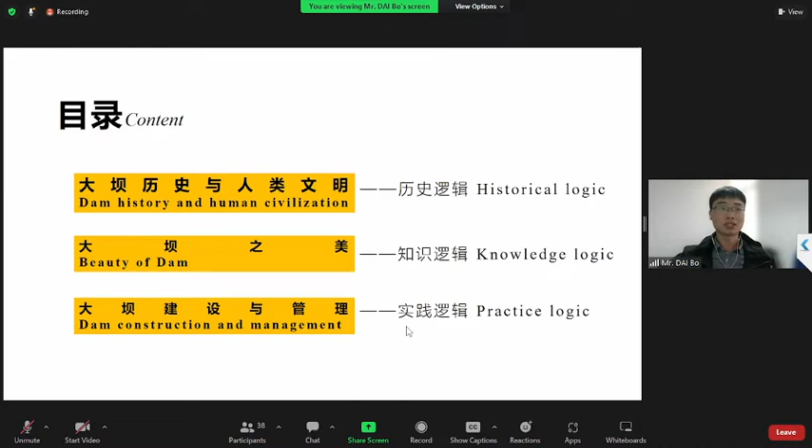Let's turn to the next part, history of dams in the world, from 3 time scales, namely 3,000 years, 200 years, and 100 years.

As you can see from this figure, at point A, in the early 1950s, China caught up with the total number of dams in the United States, which means that it took only a few years after 1949 to complete the journey of the United States in more than 100 years.

You can see from point B in the figure, in the early 1970s, the total number of dams in China was equal to the total number of dams in all other countries in the world. In the early 1980s, the total number of dams in China was 3 times that in the United States, accounting for 53% of the total number of dams in the world.

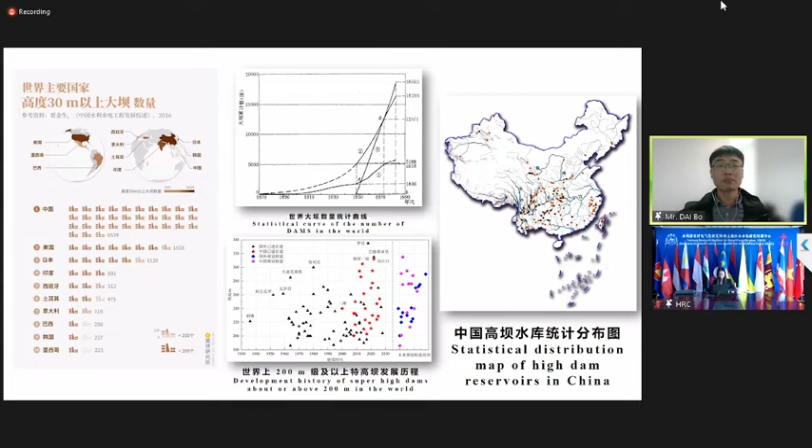Let me show the ancient dams before the mid to 19th century. The basic feature of ancient dams is that they were built by experience, whether gravity dams, arch dams, or earth rock dams. In the whole history of dam building, ancient dams took most of the time. It was the process of building these dams that allowed people to accumulate many rich practical experiences in dam building, laying the foundation for the birth of modern dams.

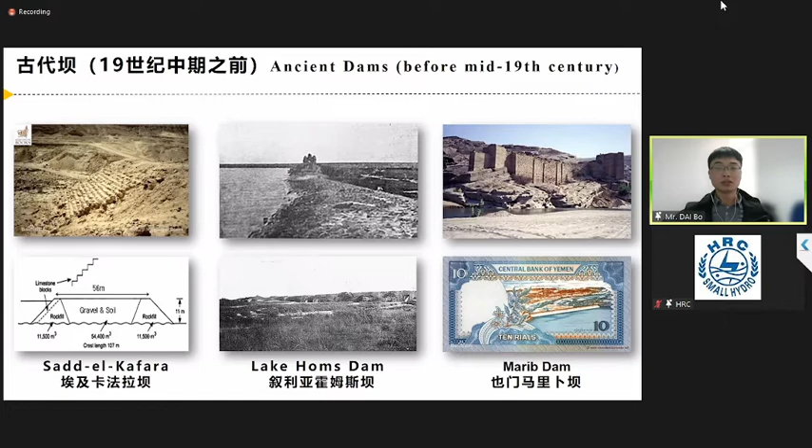The achievements and progress of Spanish masonry dam technology made important contributions to the development of dam engineering technology in the world and laid a practical foundation for the birth of modern dams in the middle of the 19th century.

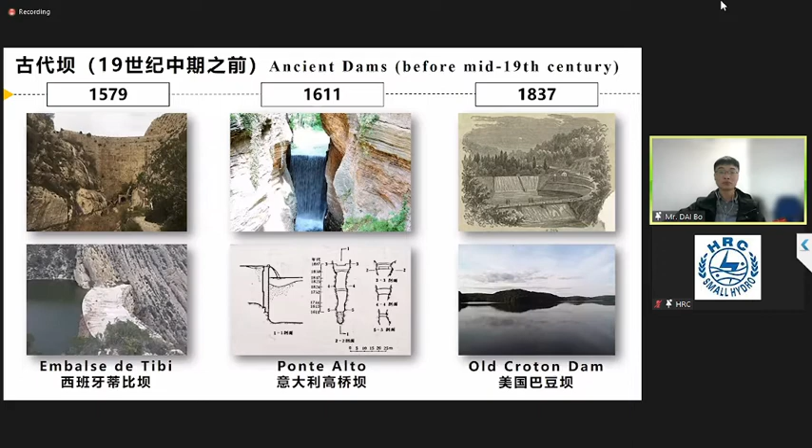The dam section is obviously more economical. The dam height continues to develop from the mid-19th century to the early 20th century, breaking through the situation where ancient dam heights remained below 50 meters for a long time, and reducing the blindness of design.

Common phenomena occur, for example, the gravity dam axis is generally designed as an arc bending towards the upstream. The basic feature of modern dams is that the design began to be guided by theory, which is mainly reflected in the design of gravity dams and arc dams.

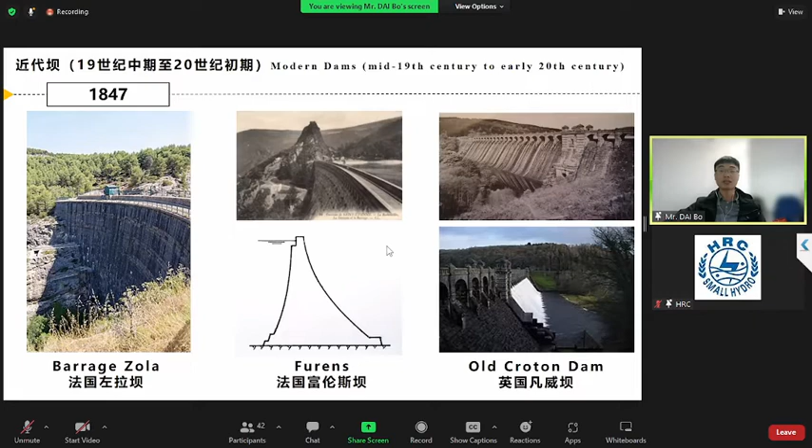The Furens Dam, as you can see in the middle, is the first modern gravity dam in the world. The problems to be solved in the design are mainly the determination of dam type, limit stress value, dam section shape, and dam axis.

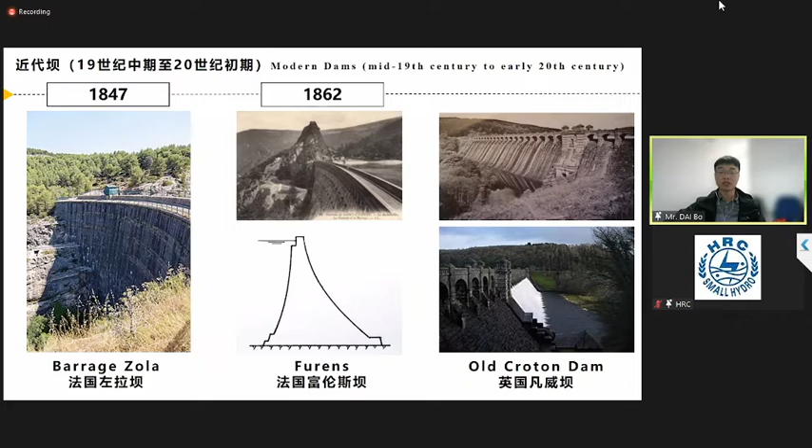This measure was adopted for the dam built from 1882 to 1891. The dam is 41.5 meters high and 411.5 meters long. It's used for urban water supply in Liverpool. It is the first dam in the world that has considered the uplift pressure of the dam body in its design.

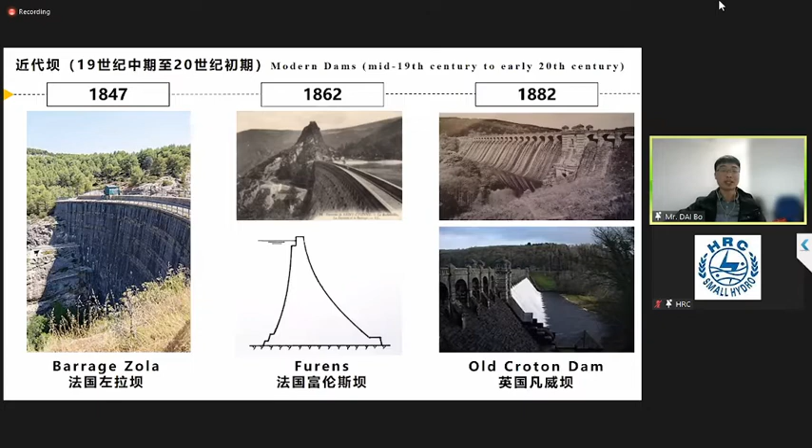The contemporary dams show some characteristics. For example, dams are built all over the world, the number of dams is growing rapidly, and high dams and large reservoirs are constantly emerging.

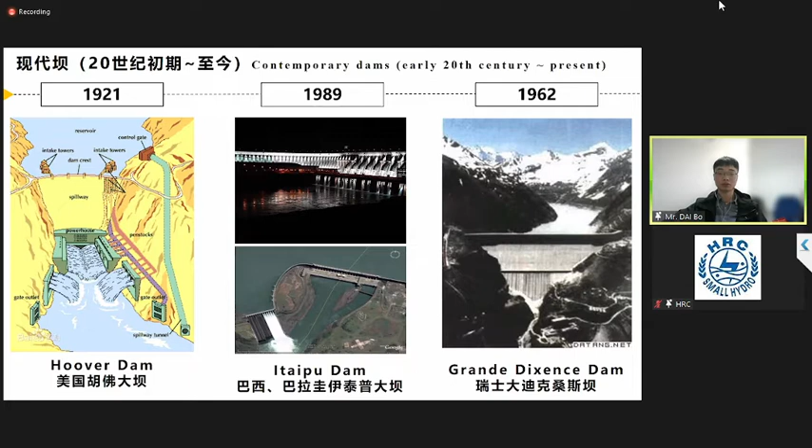Let's turn to the next part, the history of dams in China, from two time scales, namely 5,000 years and 100 years.

According to preliminary estimates, the whole system forms a reservoir covering an area of about 13 square kilometers, with a storage capacity of more than 60 million cubic meters. It is the earliest site of a large-scale water conservancy project discovered so far in China, and also one of the earliest dike systems discovered in the world.

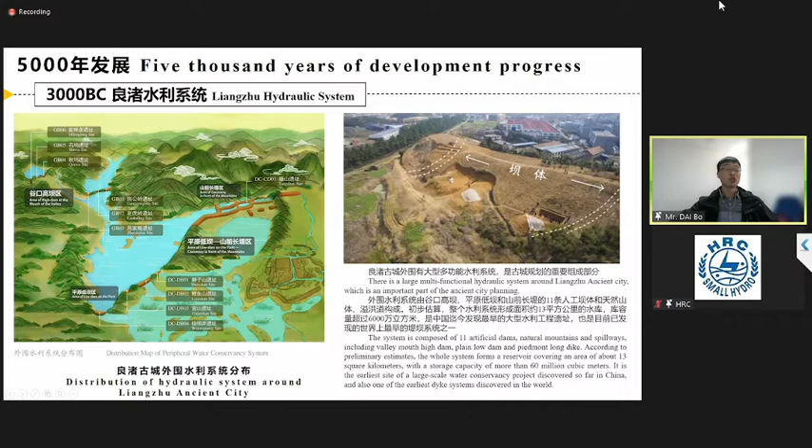Anfengtang Reservoir is located 30 kilometers south of Shou County, Huainan City, Anhui Province. It was named Quebei in ancient times and was built in the period of King Zhuang of Chu in the Spring and Autumn period. The time is between 613 to 591 BC, by Sun Shuao, the prime minister of Chu. It is a famous large-scale irrigation project in Chinese history and still has significant irrigation benefits.

Dujiangyan irrigation system, located on the Min River in the west of Dujiangyan, Chengdu, Sichuan province, west of Chengdu Plain, was built in the late years of King Zhao of Qin, about 256 BC to 251 BC. It's a large-scale water conservancy project organized and built by the prefect of Shu County, Li Bing, and his son, on the basis of the work of their predecessors.

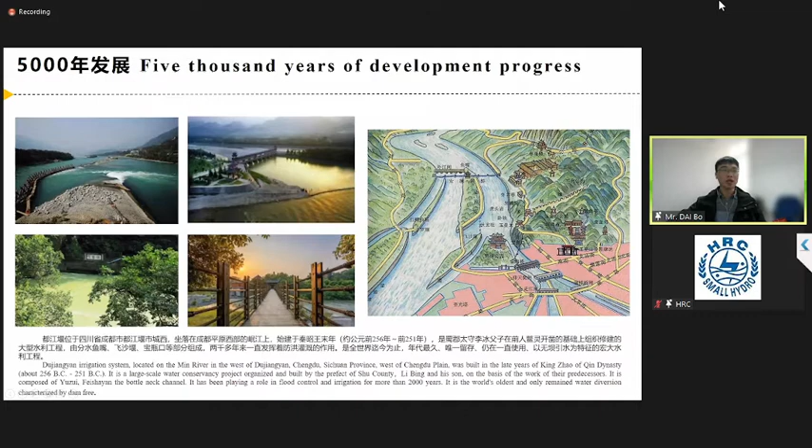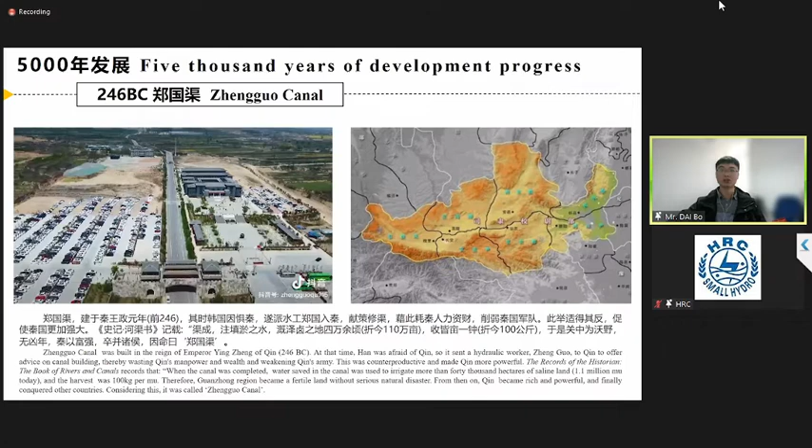Zhengguo Canal was built in the reign of Emperor Yingzheng of Qin, around 246 BC. At that time, Han was afraid of Qin, so it sent a hydraulic worker, Zheng Guo, to Qin to offer advice on canal building, thereby wasting Qin's manpower and wealth, so as to weaken Qin's army. This was counterproductive and made Qin more powerful.

The Records of the Historian, in the Book of Rivers and Canals, record that when the canal was completed, water saved in the canal was used to irrigate more than 40,000 hectares of saline land, 1.1 million mu today, and the harvest was 100 kilograms per mu. Therefore, the Guanzhong region became a fertile land without serious natural disasters. From then on, Qin became rich and powerful, and finally conquered other countries. Considering this, it was called Zhengguo Canal.

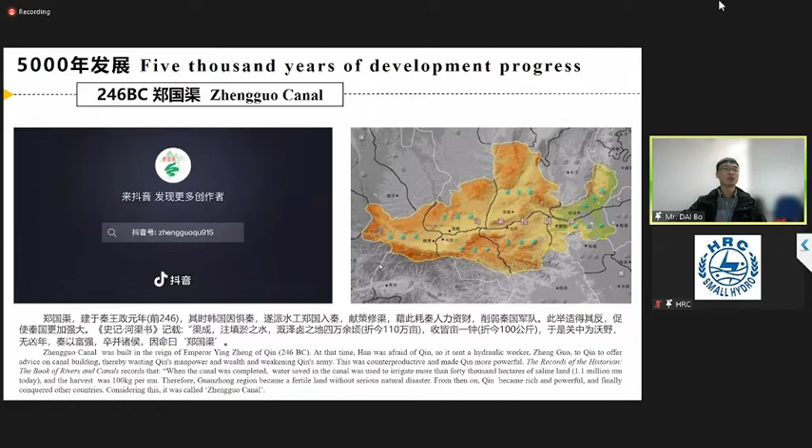Lingqu Canal, known in ancient times as Dou River, Xing'an Canal, etc., was a great project created by the ancient Chinese people. It is located in Xing'an County, Guangxi Zhuang Autonomous Region, and was built for navigation in 214 BC.

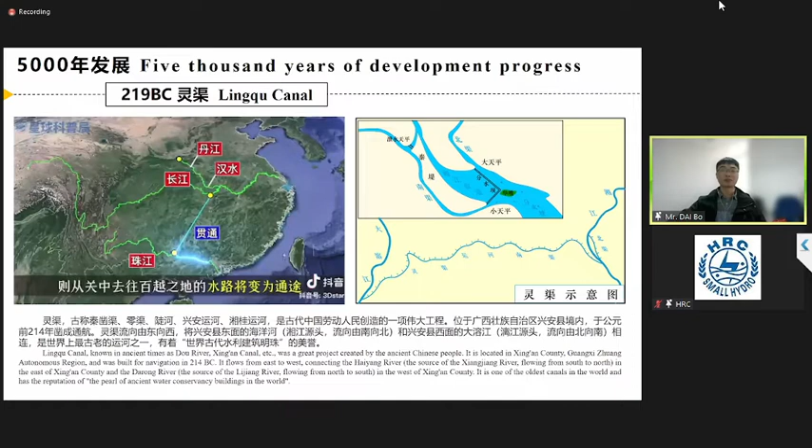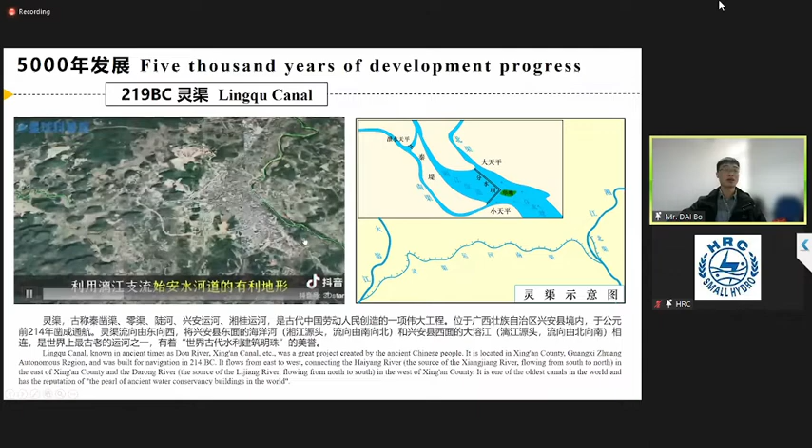It flows from east to west, connecting the Haiyang River, the source of the Xiangjiang River, flowing from south to north in the east of Xing'an County, and the Darong River, the source of the Lijiang River, flowing from north to south in the west of Xing'an County. It is one of the oldest canals in the world and has the reputation of the pearl of ancient water conservancy buildings in the world. From the video and the figure, you can see the distribution of the Lingqu Canal and its locations.

Let me show you 100 years of glory of dam development in China, from 1900 to 1949. The first part is exploration. The first stage was from 1900 to 1949. There are only 21 dams higher than 30 meters in China, with a total storage capacity of about 28 billion cubic meters and a total installed hydropower capacity of 540,000 kilowatts.

Flood is a serious disaster. Basically, torrential rain results in catastrophe, light rain leads to disaster, while no rain causes drought, without advanced technology to manage it.

The next stage is development, the second stage.

During this period, China was the most active country in the world in building reservoirs and dams. The number of dams above 30 meters increased from 21 to 3,651, with an increased total storage capacity of about 298.9 billion cubic meters, and total installed hydropower capacity of 18.67 million kilowatts. The main purposes of dam construction were flood control and irrigation. Due to constraints of technology, investment, and other factors, it was still relatively backward compared with developed countries, although great achievements had been made overall.

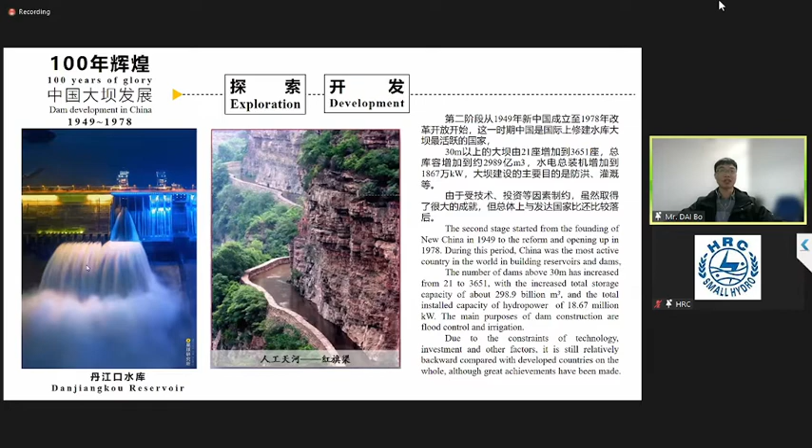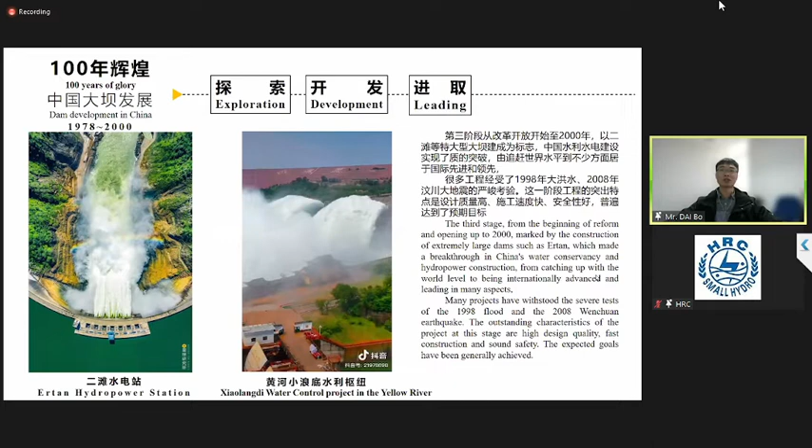The third stage is leading, from the beginning of reform and opening up to 2000, marked by the construction of extremely large dams such as Ertan. As you can see from the left figure, it's Ertan hydropower station, which made a breakthrough in China's water conservancy and hydropower construction, going from catching up with the world level to being internationally advanced and leading in many aspects. Many projects withstood the severe test of the 1998 flood and the 2008 Wenchuan earthquake. The outstanding characteristics of projects at this stage are high design quality, fast construction, and sound safety. The expected goals were generally achieved.

The left video shows us the Xiaolangdi project. It's a key Chinese national project, located 40 kilometers north of the ancient city of Luoyang in central China's Henan province. The project is the largest of its kind on the Yellow River, and is second only to the Three Gorges project on the Yangtze River. Xiaolangdi is a multi-purpose project for flood control, ice control, drainage, industrial and municipal water supply, and hydroelectric power.

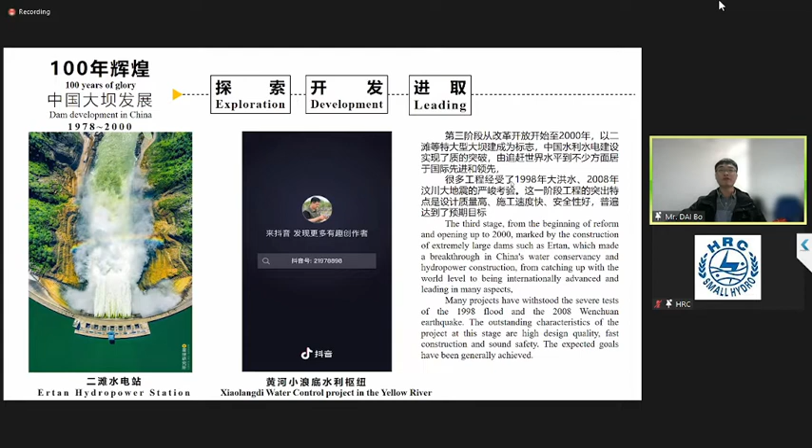The fourth stage is creation. Since the 21st century, China has entered the fourth stage of independent innovation and leading development, marked by the Three Gorges project and the South to North Water Transfer project being put into operation. Successfully completed projects such as Xiaowan, Longtan, Shuibuya, and Jinping the First Level set new world records in construction technology. At this stage, China has focused on the safety of giant projects, super high dams, and environmental protection.

China became an international leader in many fields. Meanwhile, China also fully participated in the international water conservancy and hydropower construction market, with over half of the international market share.

So can we allocate water resources from the south to supply the north? This is the idea of the South to North Water Transfer project. Then we find that it's a very hard project. Our second step is to detail the construction so people can intuitively feel all the aspects considered in the engineering design and the difficulty of completing the project. After all, a super project that has gone through 50 years of demonstration, planning, and more than 10 years of construction can never be as simple as it once seemed.

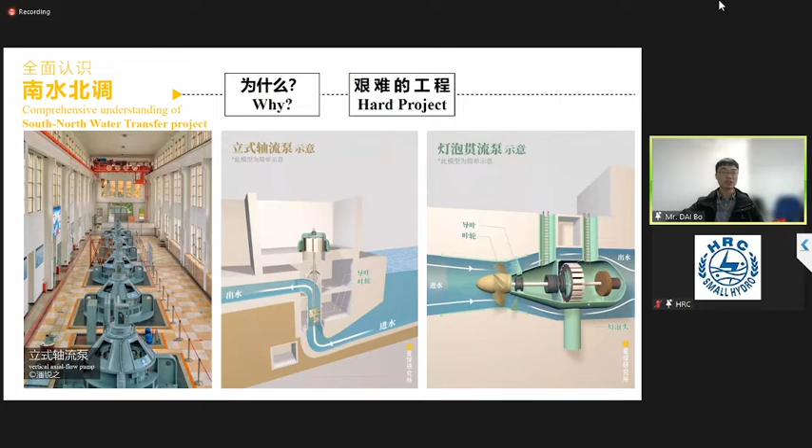For example, in the East Line project, we hope people can see how we use the 13-stage pump station to lift water from the Yangtze River by nearly 40 meters, so that the water can flow to higher elevations, as you can see from the left GIF and the right figure. In the Middle Line project, how do we make an old dam that had been in service for 40 years taller by 14.6 meters, and build a new line 1,400 kilometers long, so as to realize the whole gravity flow?

Now, let me show you behind the scenes stories.

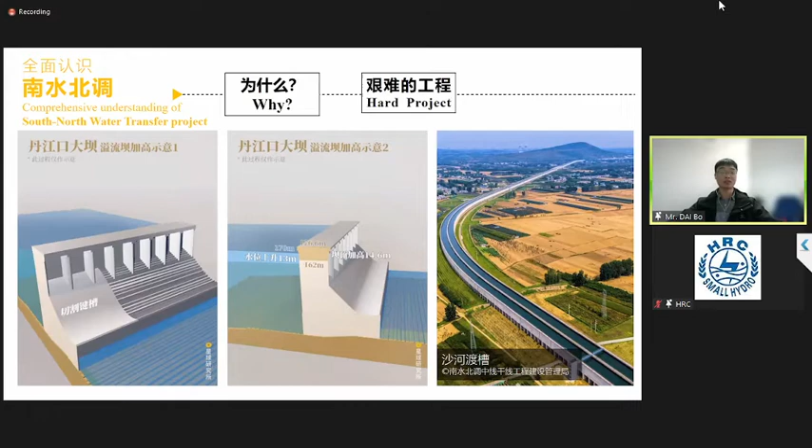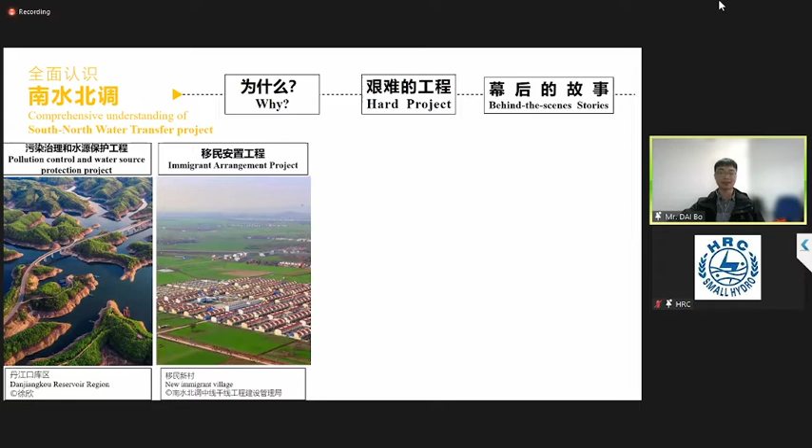In addition to project construction, behind the South to North Water Transfer Project, there are super projects ordinary people cannot see, such as pollution control and water source protection. At the beginning of the East Line project's construction, only one section along the line met the Class 3 standard for surface water, making it basically unusable as a drinking water source. Therefore, adequate water pollution control had to be carried out. For the Middle Line project, it was also necessary to shut down various highly polluting industries in the upstream basin to improve water quality.

It is also a resettlement project, as you can see from this figure. For example, in order to store water in the Danjiangkou Reservoir, 340,000 people had to bid farewell to their ancestral homeland and go to a strange land to rebuild their homes. What we hope readers and audiences can see is how every village, household, room, land, and tree in the relocation area was investigated and counted one by one. In the immigration area, we see how new immigrant villages were built and how some of the limited arable land was squeezed out for distribution to immigrants. We also hope people can realize that every ordinary person is a contributor to such a super project.

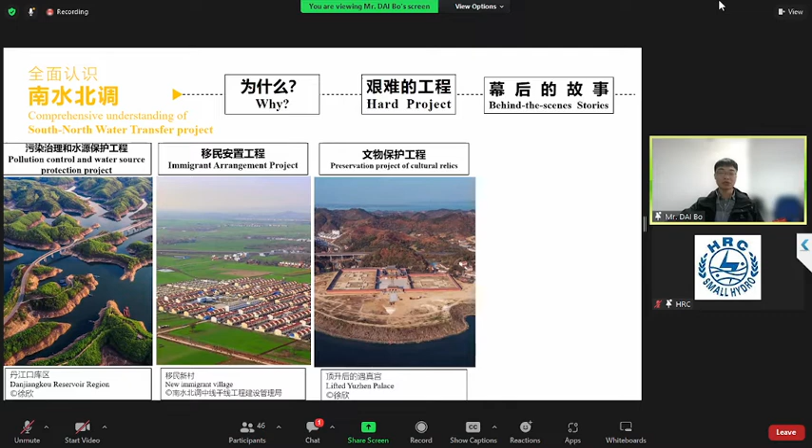In addition, there are various cultural relics and historic sites threatened by inundation that must be rescued or excavated. Therefore, the South to North Water Transfer Project is also a cultural relic protection project.

Finally, the South to North Water Transfer Project is an ecological compensation project. For example, we will show how the supporting Xinglong Water Control Project and the Yangtze River Diversion Project prevent the lower reaches of the Hanjiang River from affecting farmland irrigation and watershed ecology on both banks, by storing water upstream and replenishing water downstream. Behind this super project, countless projects we never noticed work together to ensure water supply to more than 40 large and medium-sized cities, including Beijing, Tianjin, and Zhengzhou, and more than 5 million people throughout North China who had a long history of drinking high fluoride water and brackish water.

Invisible super projects are miracles created by countless people.

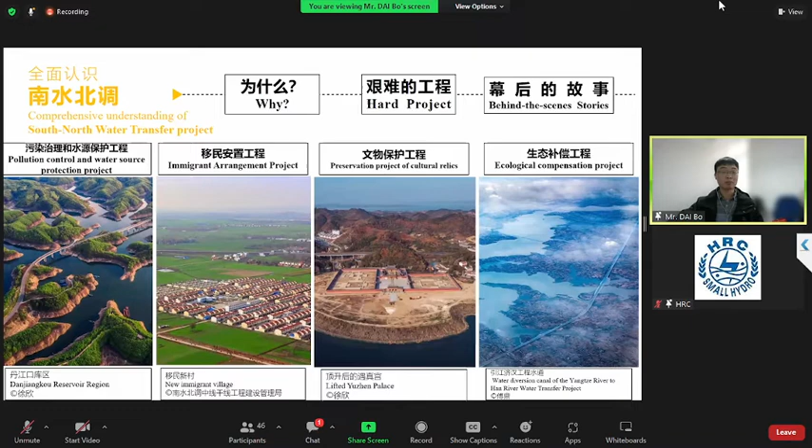Now, let's turn to the new part: beauty of dams. There are various functions of dams, like flood control, irrigation, water supply, electricity generation, travel, and shipping.

For flood control, with the development of hydropower and water conservancy technology, modern reservoir development and utilization is changing from the defensive type to the risk management type. How to make full use of flood resources and play the role of reservoirs in regulating the water environment is a higher standard for modern reservoirs proposed by sustainable development.

As for the irrigation function, with further growth of population, the demand for food is increasing. For countries and regions mainly engaged in agriculture, drought will reduce grain production or even cause crop failure, leading to famine, poverty, economic contraction, and social unrest. Through the regulation and storage of water resources by the reservoir dam, seasonal rivers become perennial rivers, ensuring sufficient water for irrigation, effectively alleviating drought, improving food production, and maintaining social stability.

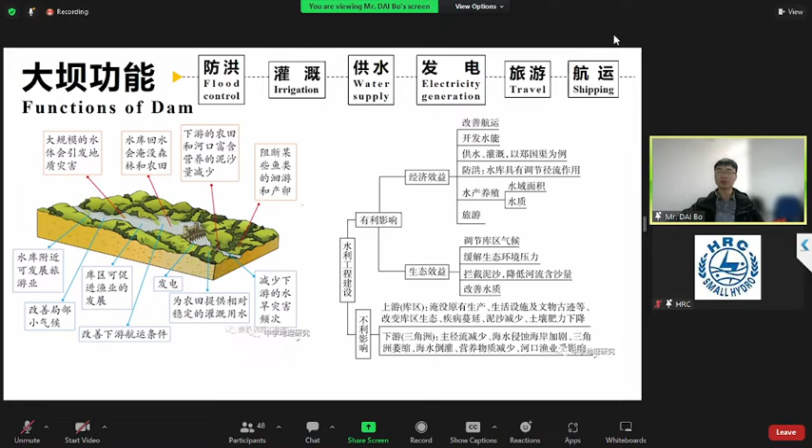Power generation: energy is one of the main factors affecting regional sustainable development, and sustainable development mainly aims to reduce consumption of non-renewable resources. Traditional thermal power generation consumes large amounts of non-renewable raw coal resources. With the development of the economy, energy consumption continues to increase. If we do not seek new energy, we will face an energy crisis.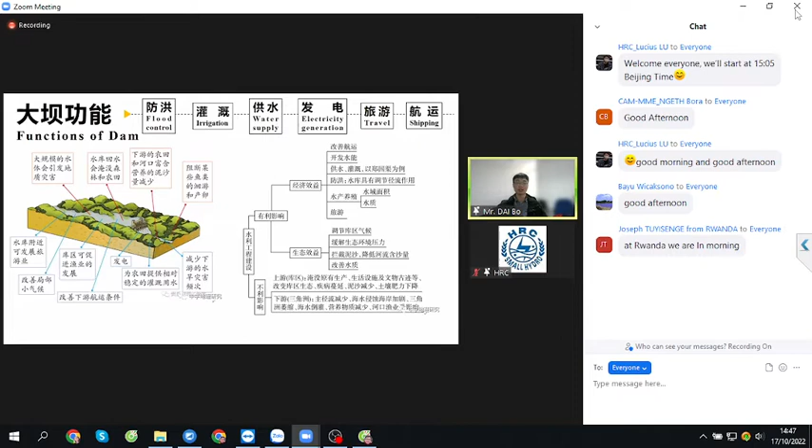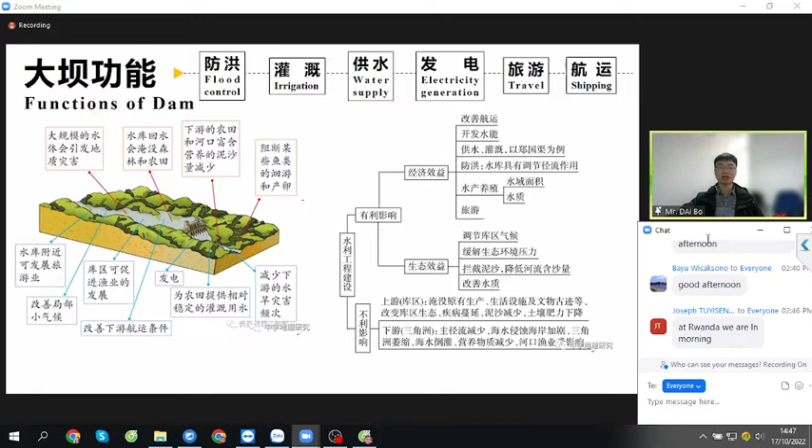Hydropower resources are renewable. According to statistics, the theoretical reserves of hydropower resources in China reach 676 million kilowatts, and annual power generation can reach 5.92 trillion kilowatt hours. Abundant hydropower resources can ease energy tension, play a very important role in accelerating economic development, and provide a reliable basis for regional sustainable development.

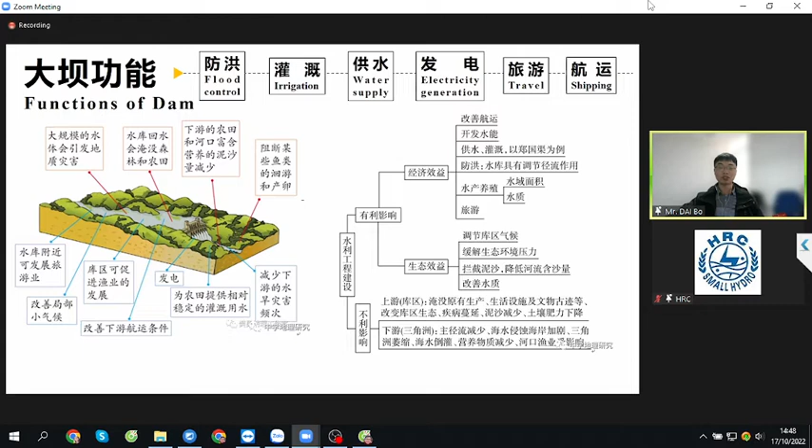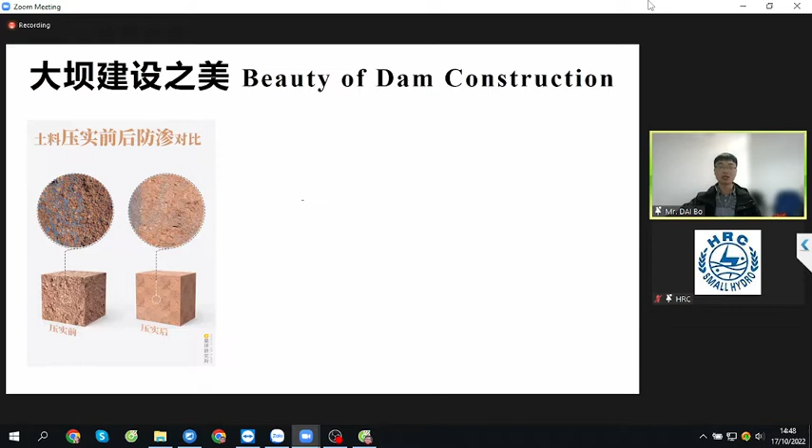For example, we can visually see the comparison of anti-seepage performance before and after soil compaction, as shown in the left figure, and the difference in anti-seepage performance between the earth dam in the middle and the rock-filled dam on the right, through these pictures.

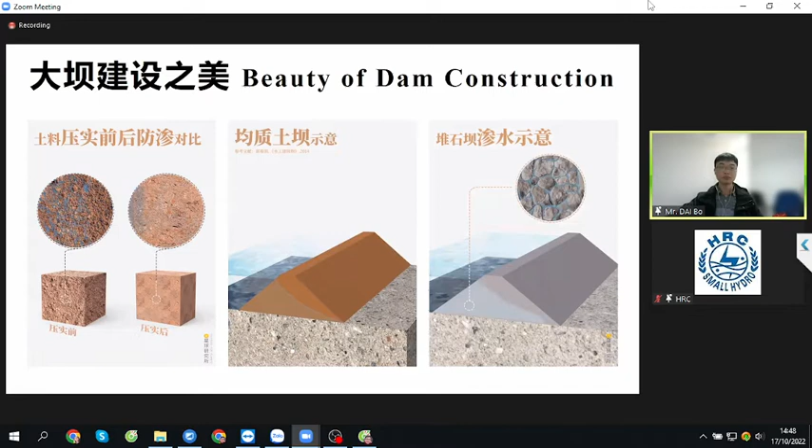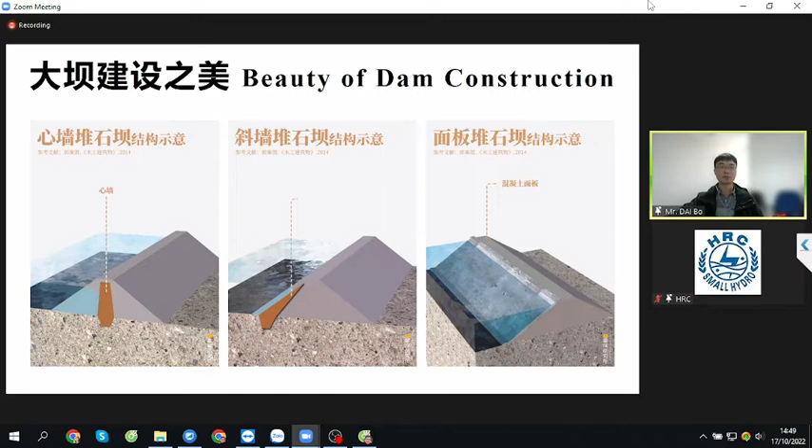On this basis, we can better understand why we need to add various anti-seepage structures when building rock-filled dams, such as core walls or inclined walls. This is the inclined wall made of soil, or even face plates made of concrete. We call this a concrete face dam. The typical example is the Shuibuya Dam.

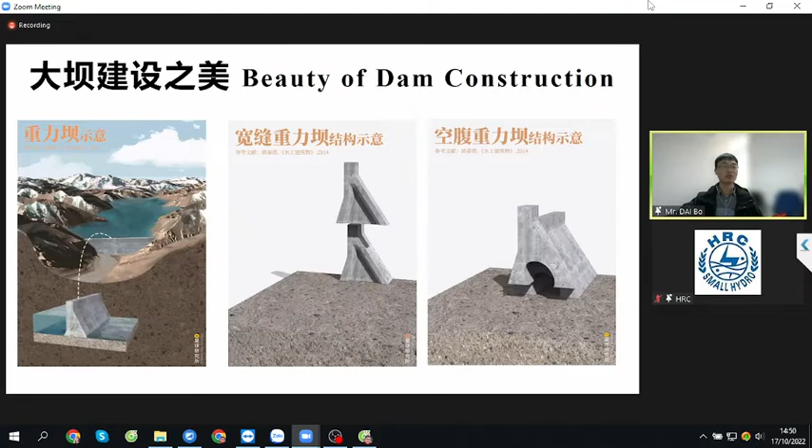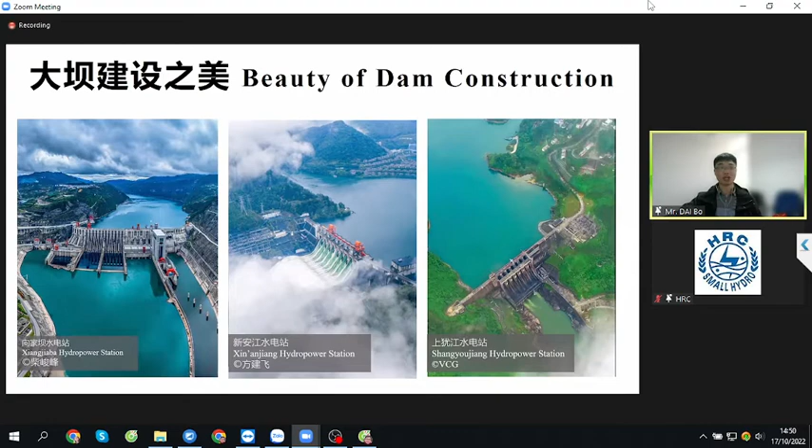The next one is arc dams. The typical example is Wudongde hydropower station. Similarly, in the form of water, we can intuitively show why the arc dam can greatly reduce the use of materials and costs while achieving sufficient strength.

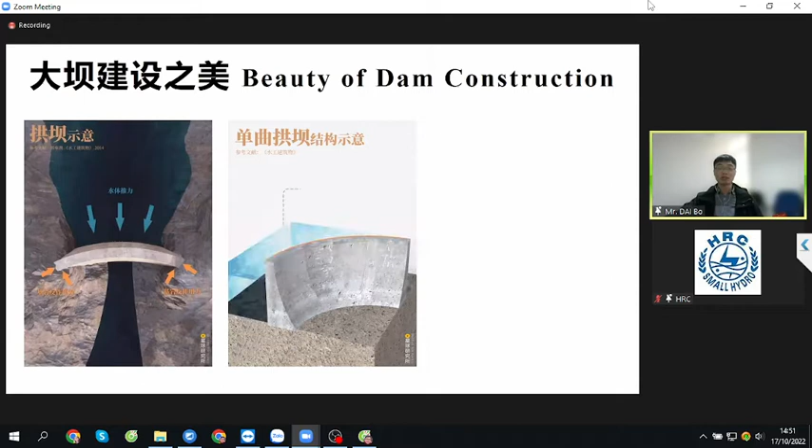What are the differences between double curved arc dams and single curved arc dams? They can be simply and concisely presented through model illustration. It is believed that ordinary people can easily understand how we built these dams through this schematic structure diagram, and what are their characteristics and differences.

Some people may say, I feel like I have taken the courses of hydraulic structures again. However, the school curriculum can take a semester to ponder and study, while popular science in the new media era must impress audiences within half an hour.

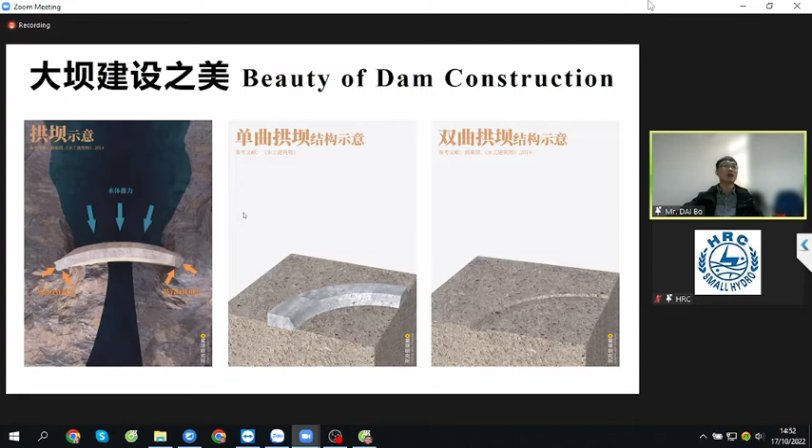The figure shows the natural infrastructure for water management, investing in nature for multiple objectives. Natural infrastructure represents the services provided by ecosystems, similar to those provided through construction and traditional infrastructure methods. The composition, structure, and function of the natural infrastructure in the river basin, as well as the way it interacts with built infrastructure, determine the generation of main services and common benefits.

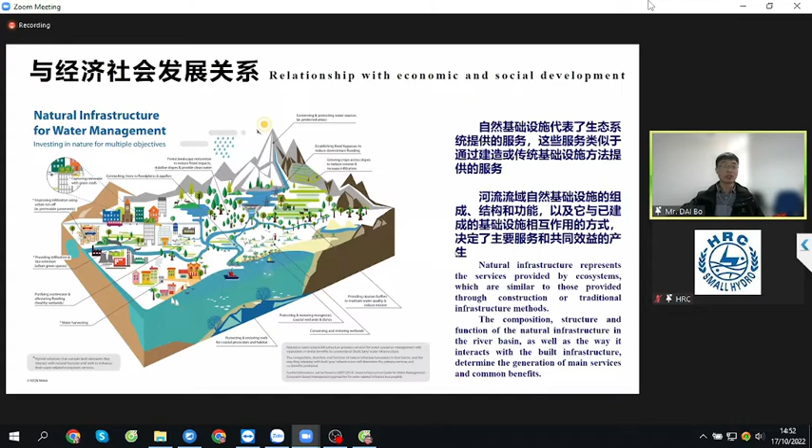Now let's turn to the last part: dam construction and management. First, let me show you some typical projects in countries around the Mekong River basin.

The Nam Ngum 4 and 5 hydropower stations in Laos. The Myitsone Dam and Yeywa hydropower stations in Myanmar. Sirikit hydropower station and Bhumibol hydropower station in Thailand. The Se San II hydropower station and Kirilong hydropower station in Cambodia. Son La hydropower station and Hepin hydropower station in Vietnam.

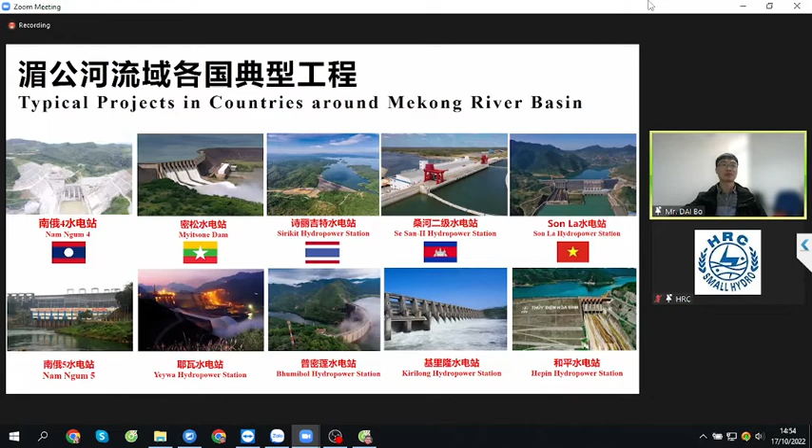There are also some typical projects in ASEAN member countries, such as the Bakun hydropower station in Malaysia, and the Marina Barrage in Singapore.

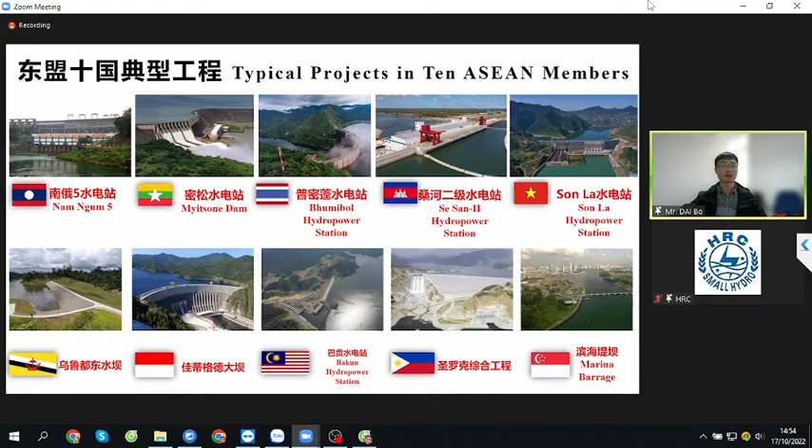There are also safety risks of dam operation, especially the safety of hydropower projects. High dams in Europe and America have experienced safety problems. For example, the Kölnbrein Arc Dam, 200 meters high in Austria. The France Malpasset Arc Dam breached. The Teton Dam breached in the USA; this dam is 93 meters high.

Accident of Sayano-Shushenskaya power station in Russia, 242 meters high. Destroyed Oroville chute in the USA, 235 meters high. Ziller Arc Dam in Austria is 186 meters high. And the bank slope instability of the Vajont Dam in Italy is very famous, as you may know.

Europe, the United States, and the former Soviet Union have paid a high cost. The safety problem of high dams and large reservoirs has a typical characteristic: small probability but big disaster.

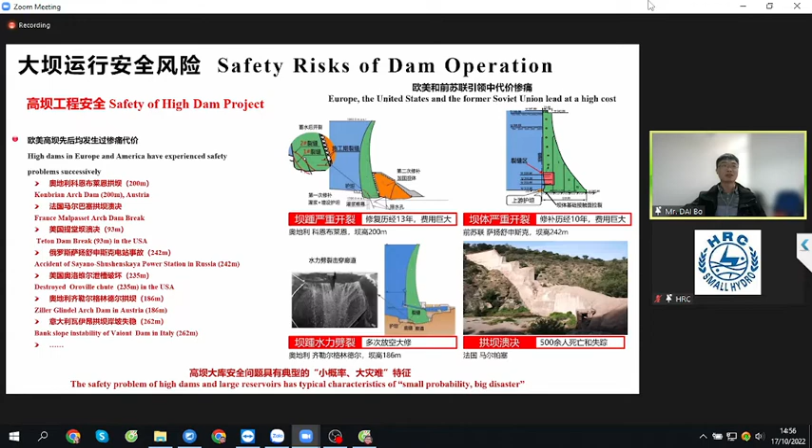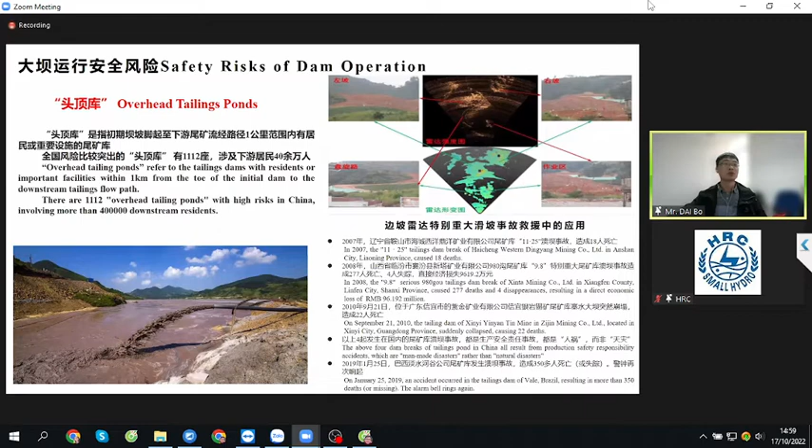The United States, Switzerland, Britain, and other developed countries have national dam safety laws. Most countries take the 4 eyes principle as the basis of dam supervision, including the self-supervision of the dam owner or operator, and the independent supervision of a third party.

In 1800 BC, King Hammurabi of the Babylonian dynasty issued laws, including punishment regulations for dam maintenance personnel.

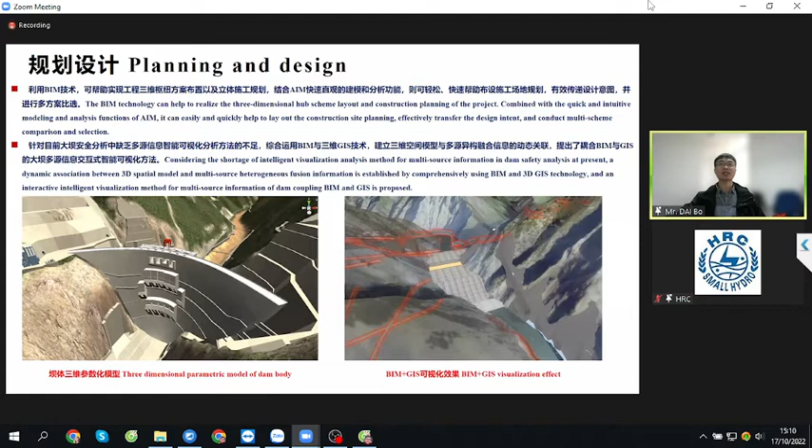The intelligent building system involves a wide range with various types and is a huge system project. The basic architecture consists of the perception layer, network layer, data layer, platform layer, application layer, and system integration interface. The perception layer is the data source of the intelligent building system, adopting data transmission protocols to support application in complex network environments.

The data layer is the data storage center of the intelligent system. The platform layer takes the basic platform of the intelligent building system as the core. The application layer includes PC business, mobile business, large screen monitoring, decision analysis, mobile query, WeChat, and other application systems. The system integration interface is for integration with other automation systems, monitoring systems, business systems, management systems, etc., reflecting their scalability and integration.

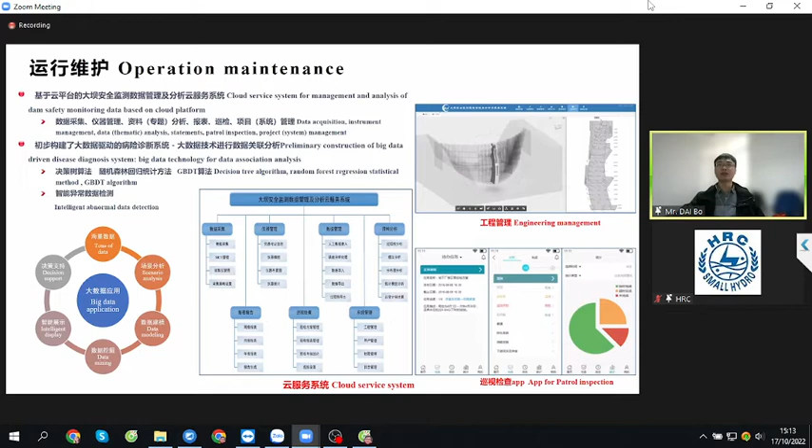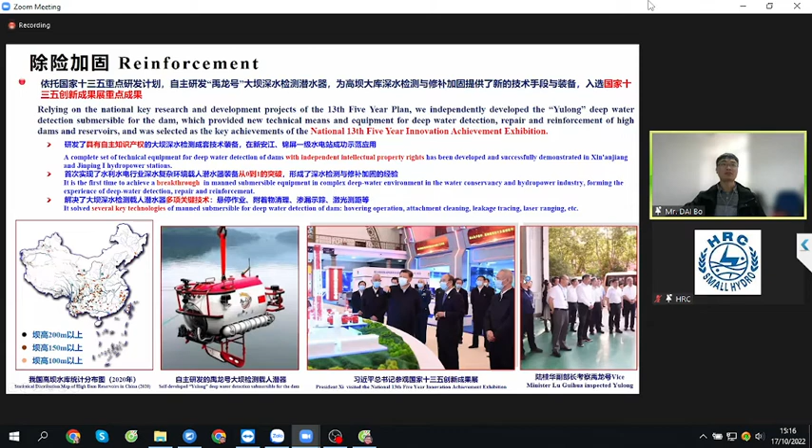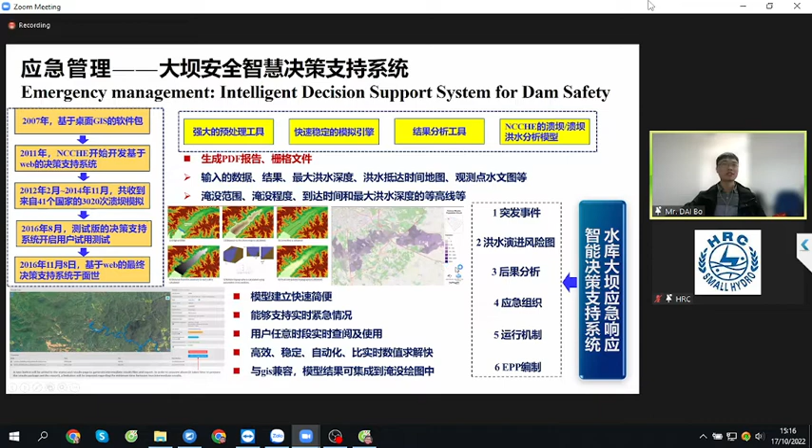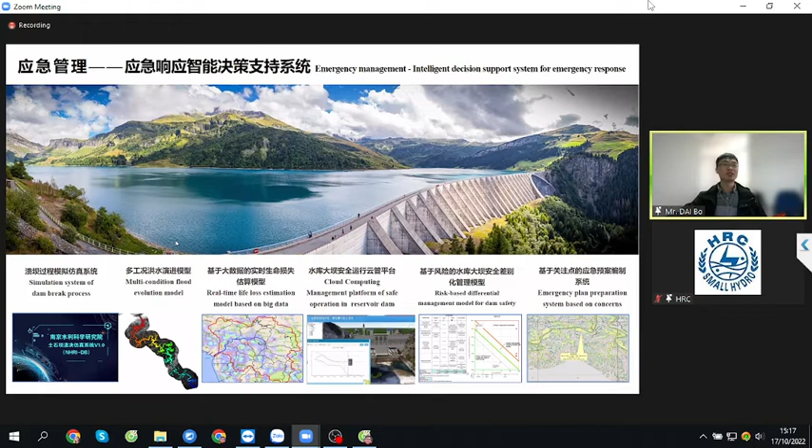Water conservancy projects generally have multiple functions and comprehensive benefits, but the direct reasons for building them in different times vary. The direct reason in the agricultural era is the demand for agricultural development. In the industrial era, and in the post-industrial era, it is transforming towards the demand for people's livelihood.

Smart water management systems are incorporated into the national strategic system. The smart water management systems in the United States, Australia, Singapore, and other countries are sound with mature data systems. Large-scale smart applications have been formed with prominent predictive function and significant disaster reduction benefits.

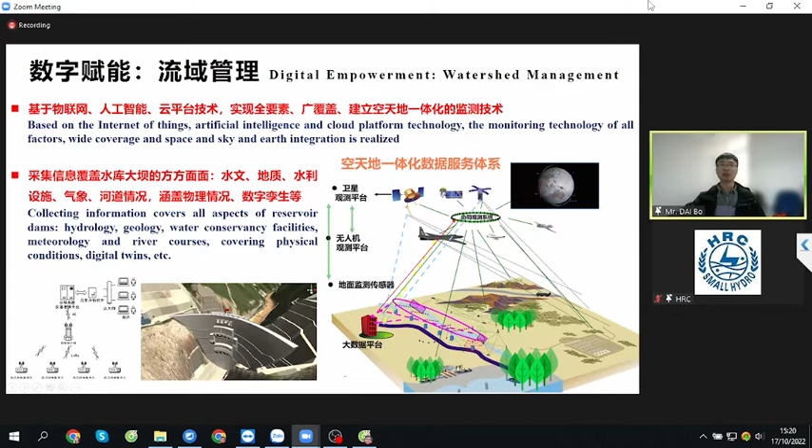For digital empowerment, it also needs functional evaluation, a complete set of intelligent sensing, risk identification, and emergency response technology for reservoir dam emergencies. We deeply excavate the multi-factor causes in dam break accidents and analyze the root causes of dam break accidents, achieving intelligent perception of emergencies and accurately evaluating the expected consequences caused by emergencies.

At last, I want to emphasize that better dam, better life. That's all. Thanks for your attention.